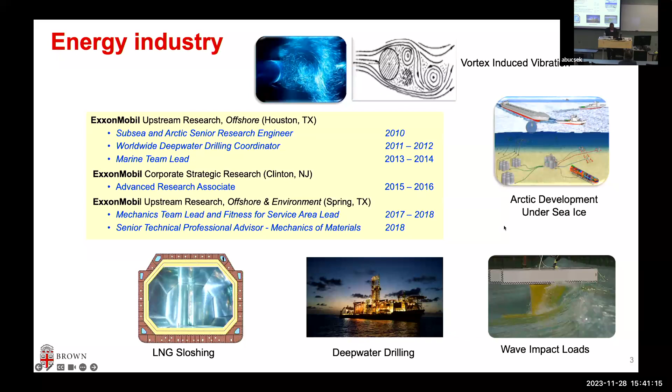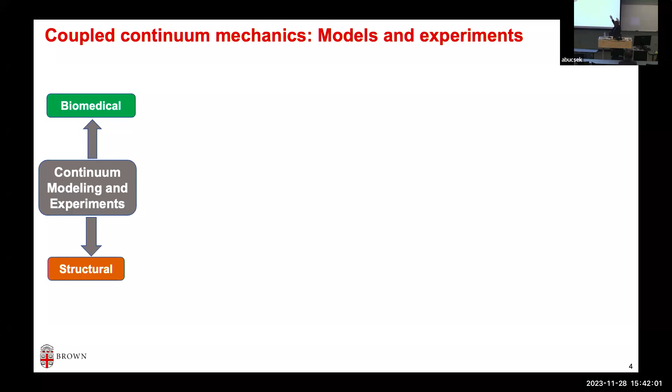What have I been doing at Brown for the last 5 years? Basically, my research group is in the development of theoretical frameworks or constitutive models for different kinds of materials. What are the pending problems? Typically very nonlinear materials, multi-physics problems, coupled mechanics. If I break down this continuum scale modeling, we divide it into two groups: structural mechanics, which I'm familiar with as a mechanical engineer, and a long-term vision of expanding mechanics into new and emerging areas. To me, biological materials where mechanics couples with biology is a frontier for me to go. So that's also a stream I'm working towards. These are the two groups defined.

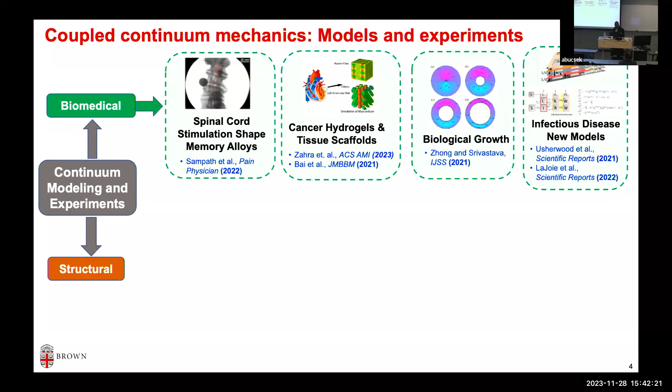So a bunch of different problems we have worked on, all the way from modeling particles to biological growth. I'm not going to talk about this work in detail, but if you're interested in any of the topics, this work has been published in the last 4 or 5 years, and you can find it. On the structure side...

You have all the various exotic materials like metastable steels that have phase transformation coupled with plasticity, which is deformation and temperature.

We're also looking at machine learning, which as students you're all definitely interested in - data science, machine learning, AI, all the words you hear. As a mechanics person I don't have that background, but as a constitutive model developer, when I talk to people in machine learning, they say their first job is to find a neural network that means you don't need to develop material models - give it experimental data and machine learning can figure out the material model. So they're kind of planning to make me unemployed, I guess. So my job is to develop the model. It's basically a joke, but I'm interested in keeping my eyes on developments in the neural network area. I'm not a computer scientist, I'm not interested in that, but where's the interface of applying machine learning concepts to structural mechanics problems? That was my goal.

So we had some funding from the Department of Transportation. We wrote the proposal, got funded, and worked on that area. I'll briefly talk about that. I talked about these two projects, I'll briefly mention them.

I'm going to leave the rest of the topics, but they're basically on the idea of developing deformation, fracture, or damage models at the continuum scale. What is continuum scale? It's the macroscopic scale where we interact with objects. But the interesting thing is all the physics happens at very, very small scales, normally 6 to 7 orders of magnitude below - at the atomistic scale for metals, the molecular polymer chain length for polymers. I'm trying to take that physics to develop models that can predict things at the macroscopic scale, and that's your continuum scale.

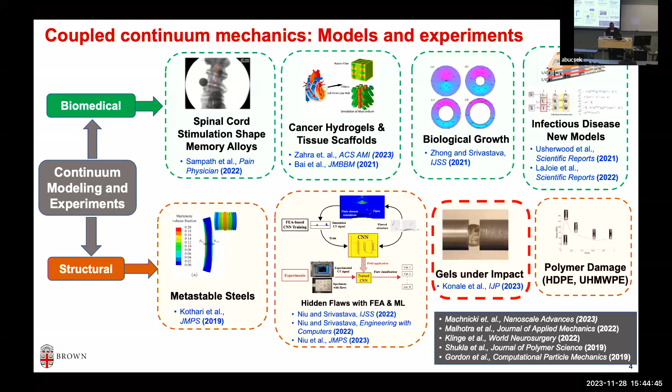So all these, you can find if you're interested in any topics - we have some papers out there on each of these topics that you can look up.

Oh my gosh, the control of the mouse here. Absolutely. It's unbelievable how protected this stuff is.

So what you saw is basically this very, very soft gel-like polymer, and this guy was hitting his hand with that layer - there's no injury. And I can give many, many examples. So what are these very soft, lightweight materials that can absorb all this impact energy? This is a case where experimental or commercial applications are ahead of the fundamental mechanics side - people know these materials can do this kind of behavior. Me, as a mechanics person, I want to understand and develop a mathematical model to model the behavior so we can design these structures.

And you'll find there's a broad set of applications, for sports injury - you can think about making helmets out of it - for the Navy, where we also got funding, putting a thin layer of structure that is lightweight to take shock energy. So all the way from impact, falling down, your knee pad, your shoes, to helmets, to shock absorbing for the Navy - this material. So we wanted to understand the physics and develop a physics-based model for this material.

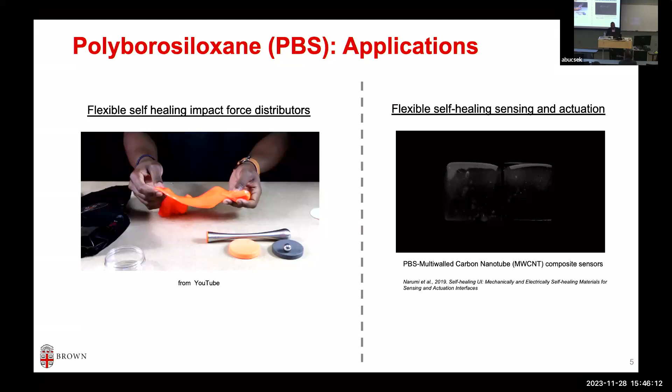These materials also have another interesting feature - self-healing. I'll tell you why: because they have these dynamic crosslinks.

This is an example of a material you can put conductive particles in, and from the stretching or deformation, you can actually get a resistivity change. You can make a sensor out of it.

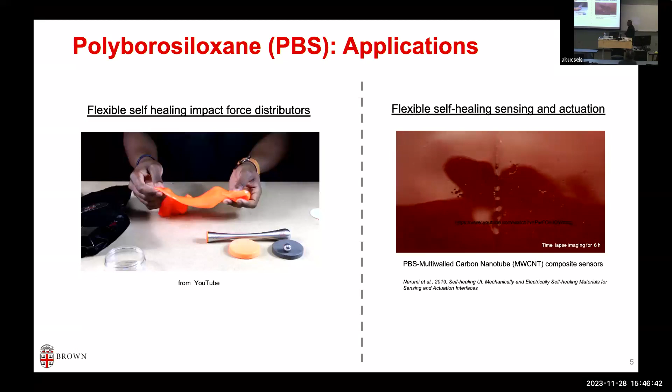You have a lot of applications, from protection to sensors to tissues, but these are self-healing. If you fracture these materials, put them together, and come back after 6 hours, you'll not know there was any failure there. So the self-healing properties are very important, and that gives it a lot of really important applications. Our interest is in modeling the behavior all the way from fracture, damage, and self-healing.

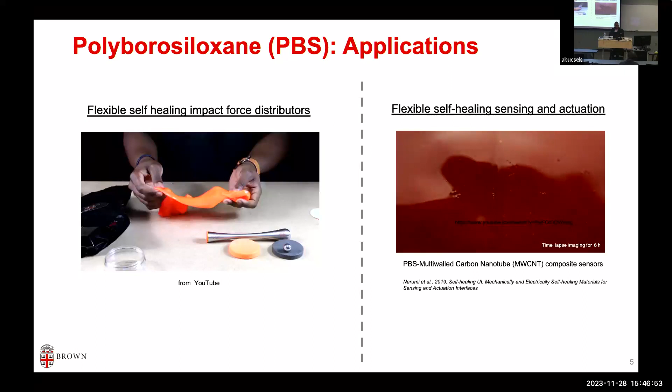That's really where we are heading. I'll talk briefly about this work and walk you through the mathematical modeling needed to model this kind of behavior. So what I showed you is one class of polymer: polyborosiloxane. It has dynamic reversible crosslinks, which gives it this rate-dependent behavior, with impact absorbing energy and self-healing properties.

These dynamic crosslinks - if you look at rubber, it's long chain molecules that look like a spaghetti ball. At the junction points, they're basically crosslinked. So when you apply load, you're stretching the network, and that's why it snaps back when you let go of the load. These junction points, in this case, are not permanent crosslinks like rubber - they're dynamic. They're forming and breaking, forming and breaking, and that's why you get very interesting properties, which I'll show you in the next slide.

So a lot of applications have already been mentioned to you, all the way from tissue engineering to impact absorption to self-healing sensors, and there's a whole plethora of literature out there in the last 4 or 5 years on a lot of applications. But we come at it from the side of understanding the behavior and modeling it.

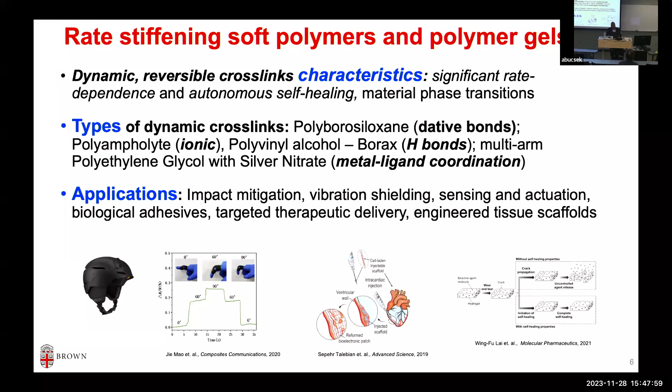So, like I said, my goal is to develop physics-based mathematical models, but we need good control to understand the behavior. First, we are interested in, for Navy applications, a very wide range of strain rates - how these materials behave. The literature data is either not there, or some of the data is questionable, so we have to do our own experiments.

So we actually spent some time trying to figure out how to make this material. These are two of my PhD students, very bright guys, and I have to give them credit for being able to do all the things I'm going to present on their behalf.

I'll skip the synthesis process, but if you look at this - polyborosiloxane is PDMS chains crosslinked by boric acid, and boric acid we used to play with like a powder for carom, I guess, when we were in India. That chemistry allows these crosslinks to form between boron and oxygen. One electron pair is basically shared between boron and oxygen, and that gives us this crosslink that is time dependent - it's breaking and forming, breaking and forming. These crosslinks give it the dynamic nature.

This is known - people who have done experiments already know this phenomenon. We took that and, of course, found it to be true. The question is, we don't know - that's only the crosslinking, dynamic crosslinking phenomenon that is known. We don't know if there's anything else going on, but we left that as a question mark.

So what does this PBS - short for polyborosiloxane - what does this dynamic crosslink do? When we make it, this is our own experiment now: if you make a sphere and put it on a table, it flows like a fluid. Just look at it on a 1-hour time scale, it will flow like a fluid. If you put it in your pocket for a few hours, it will go through the threads of your clothing. So it's fluid-like, except that instead of milliseconds, the time scale is basically hours. It flows like a fluid.

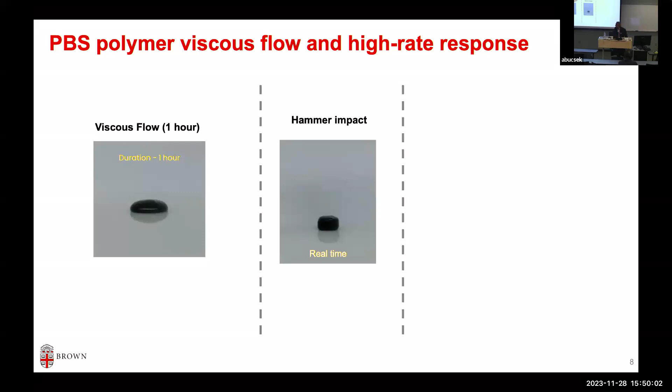So this is the real-time scale. If you look at the same material that flows like a fluid at the real-time scale, the hammer, it's basically showing very elastic material.

So yeah, some window has shown up on my laptop for some reason. That's not letting me actually move my mouse to where I want it to be.

The Kolsky bar is a very high rate experiment in the laboratory. You have two bars, you squish the sandwich, and hit it with a very fast projectile on one end that causes a stress wave to propagate.

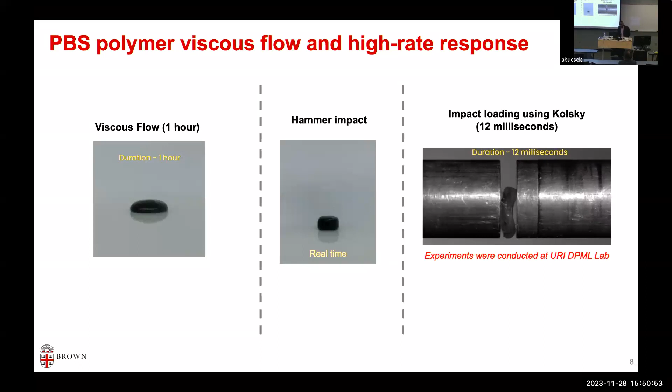So what this video shows is hours to seconds to milliseconds, about 12 milliseconds. You can see the material behaves very differently—it squishes completely and comes back. Very different behavior depending on the strain rate you're applying. All that is going on. This is a very qualitative experiment just to give you an appreciation for what's happening.

But technically, if you do scientific experiments to calibrate, this is the stress-strain behavior. As a mechanics person, we define material properties through one-dimensional stress-strain behavior. You can see very nonlinear behavior in the loading and unloading curves. Some of it is rubber-elastic-like recovery, but a lot of it is viscous dissipation, more fluid-like. It's a combination of fluid and solid-like behavior.

Very rate dependent. Moving from very small strain rate, 10 to the power minus 3, all the way to 10 to the power 4, it's highly rate dependent behavior. If I zoom into that small area, the quasi-static region, you can see very drastically rate dependent behavior with very interesting loading and unloading curves, and so on. I can take any strain value.

Looking at strain rate versus stress, you can see highly strain rate dependent behavior, which you already saw in the qualitative experiment. This is the quantitative version. A model should be based on these technical data and should be able to represent that, in one dimension.

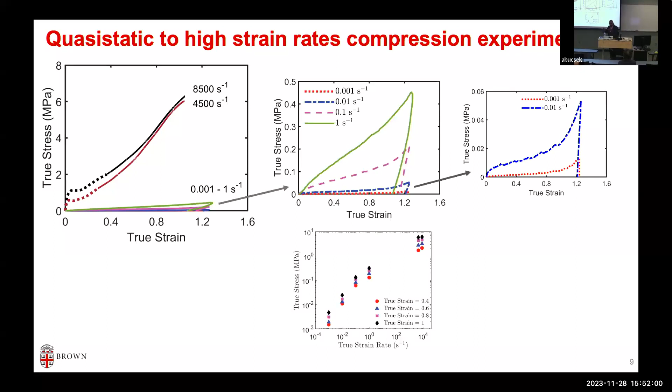Having seen those experiments, even the one-dimensional experiments on the physical behavior, now we want to develop a model. We know that the polymer's macroscopic behavior comes from the cross-linking, the network-level small scale behavior, which is cross-link dominated. So we said, let's take the first order approximation.

The kinetics of these crosslinks being formed and broken is first order. N is basically the subchain—between crosslinks you have a subchain that is elastically active from the network point of view. If you count those, the number of elastically active subchains is a function of some forward reaction rate: how many are being formed, how many are being broken. So you have a plus and minus sign, first order kinetics.

So we assume that, and we make some other simple assumptions. One is that when you deform a polymer or rubber as it's stretching, some stresses are being generated. When these subchains break and reform, they're going to form always at zero stress. That's a very physically intuitive thing to imagine—they're not forming at that high stress, they're forming at zero stress. So these are basic assumptions which make sense.

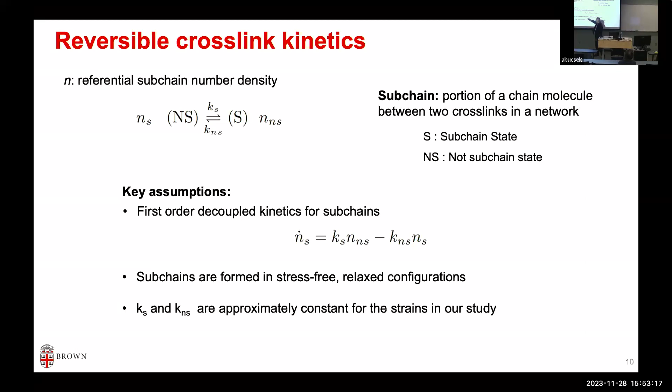So what we have done is use first order kinetics as the basic assumption to define the dynamic crosslink—the boron-oxygen bond that is being formed and broken. Then we did the stress relaxation experiment, in oscillatory rheology, like in a rheometer. All you do is apply a constant strain and watch the stress evolve. That's very viscoelastic behavior.

If you look at the first order kinetics, the shear modulus comes out like this with one parameter, and we can fit this rate parameter using experimental data. So there's the fit. But interestingly, if you take that simple assumption of first order kinetics, it gives a behavior similar to a linear viscoelastic Maxwell-like model with one spring and one dashpot.

For that model, we can write quantitative equations for the oscillatory rheology, where you subject the viscoelastic material to different strain rates. You get the G prime and G double prime, storage modulus and loss modulus functions. We can have expressions for these based on that assumption.

Now, from that one fit, we can predict—we found this very interesting—we're able to predict the G prime and G double prime quite well with that assumption. This tells us that for this strain rate range, from very slow quasi-static to moderate rate in the oscillatory rheology, the boron-oxygen dynamic crosslink is the dominant mechanism, and first order kinetics does a very good job. So this assumption works quite well in that range, and from this one fit we can predict this.

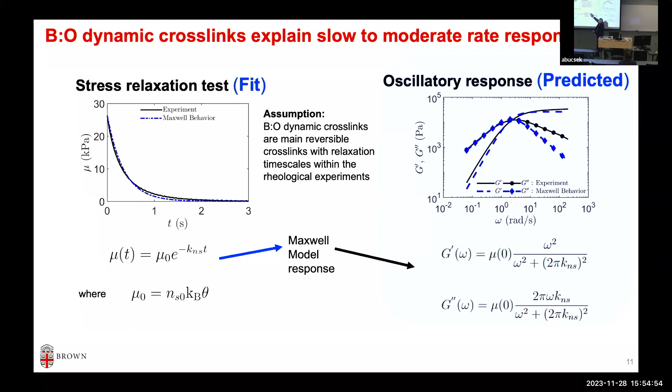So we found the time scale to be around 3 seconds, where you're looking at the fluid flow in that range. Now the question is: is there any other cross-linking mechanism, some other physics going on that other people don't know about?

So what we found in our own experiment at the very high rate—by the way, I skipped over doing the high rate experiment. Getting a good stress-strain curve for the soft material by itself is very challenging. Our collaborators spent 4 or 5 months to get this data. That mechanism cannot explain this large jump at high rate.

So there has to be another dynamic reversible crosslink mechanism. We propose that, and this is in our paper that we recently published. The second mechanism is this temporary entanglement.

Imagine these chains that also have a physical entanglement. If you're looking at larger time scale, they are sliding past each other. But at very short time scale, millisecond time scale, they actually act as junction points, as cross-linking. So intuitively, at slow strain rates you have this disentanglement, a fluid-like flow, driven by the interaction between the polymer chains, more like friction. But at very high rate, there's a lockup, and that lockup leads to this behavior.

That's our assumption. We have proposed basically 2 mechanisms from the experiment, all based on first order kinetics from the experiments. We have 2 mechanisms—one has a time scale of milliseconds that we found later.

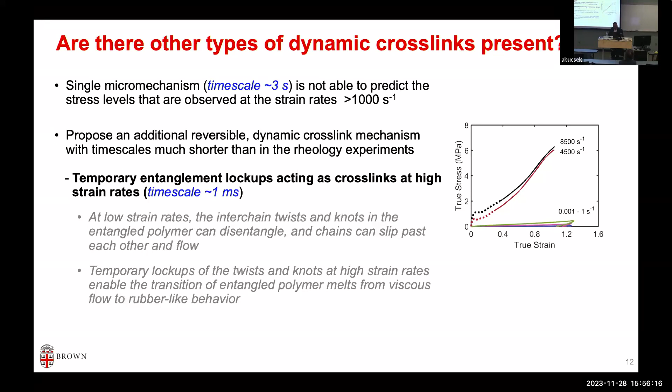So what are the key contributions? We have done characterization over a wide range, 10 to the power minus 3 to 10 to the power 4 per second, for these materials of interest at large strain. We have developed a microstructure motivated model.

I'll describe the model in a bit, but we found that in addition to boron-oxygen coordinate bond dynamics, there's also additional entanglement dynamic cross-linking, on the order of milliseconds, that is needed.

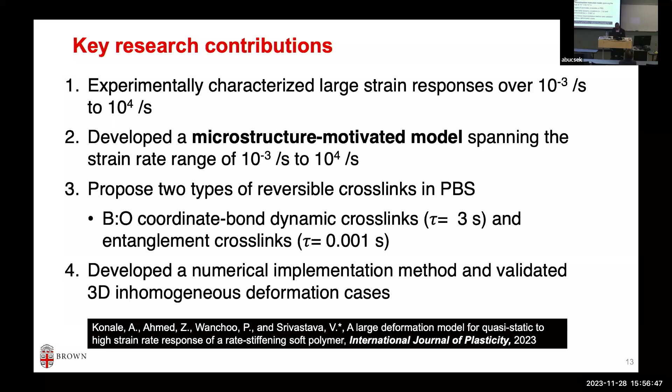We also developed the numerical implementation, which I'm not going to talk about, but you can find that information in the paper. So given this information, we found these 2 mechanisms.

For polymers, if you look at any formula, typically viscoelastic materials have 2 different mechanisms going on. One is intermolecular resistance—what happens in the nearby molecules. They may have some elastic behavior, and as your sliding chains pass each other, you also have some kind of dissipative or friction-like mechanism.

That is captured in our model as mechanism A. Then, same thing as a fishnet—you're stretching the whole fishnet, that's network stretching, known as the rubber mechanism. That is modeled as network B, the second network.

The second network has two components, B1 and B2, because you have two different dynamic reversible crosslinks: the boron-oxygen coordinate bond, and the entanglement based mechanism. That's the framework of our model.

The idea is that at very slow rate, these dynamic crosslinks are ineffective—the chains are sliding past each other, so you get a very viscous, fluid-like response. At high rates, these entanglements and different mechanisms play a role, so you have more of a network stretching behavior.

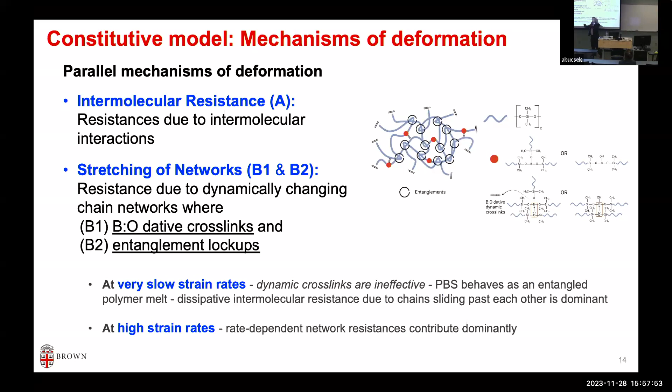That's the physical insight, now converted into some kind of schematic. If you want to picture the two mechanisms, A and B—again, the material isn't literally like this, but as a hypothetical image, think of a spring and dashpot from viscoelasticity, just imagine it in 3D and large deformation.

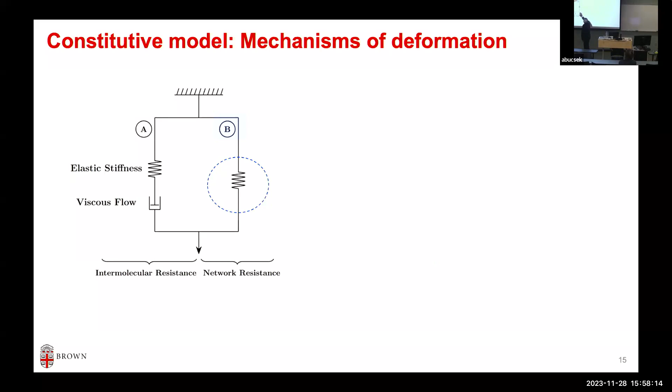Mechanism B has two mechanisms. The physical picture is each mechanism has a series of springs together, because as chains are breaking and forming over time from 0 to t, sub chains are formed at some prime time t'. So we only have to worry about the stress from t' to t.

A chain that started at 0 and deformed at time t has a different behavior than a chain formed at a much later time scale. So we have to account for all these things. The free energy, which is the mechanical response, will be a function of the summation of all these combined subchains for each of the mechanisms that we have to account for.

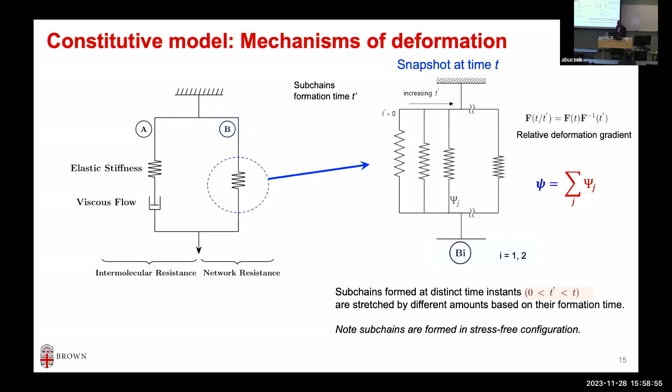So for mechanism A, again, we have done this in our standard viscoelasticity work when I was a PhD student. First mechanism: you can model elasticity using a three-dimensional linear elastic behavior. For the viscous part, we can use rate-dependent viscosity, strain rate, plastic strain rate as a function of stress, with or without temperature dependence.

This is a little bit more than what we've done in the past, we've taken that first mechanism. The only difference I want to highlight from what is conventional: a lot of times people see nonlinear behavior in soft materials and assume it's rubber elastic. Not all nonlinearity is elastic actually, a lot of it can be viscous. The difference is the physics is very different.

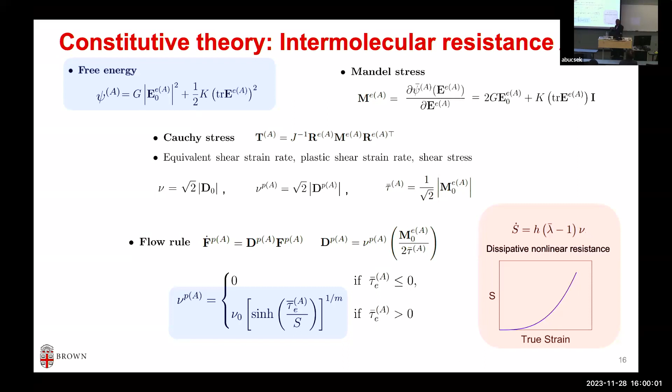Elastic will come back, viscous will not come back, right? So putting the wrong idea, just because we're used to using rubber models in the wrong place, can sometimes give trouble. So here, S is the viscous friction-like behavior. As the chains align more and get past each other, they get more and more friction, so you have a nonlinear dissipative term. That's your first mechanism.

Before I get to the second mechanism, it's all about network behavior, which comes from dynamic crosslinks that are forming and breaking. If I want to define the number of subchains that are actively forming crosslinks at any time, going from time 0 to delta t, this is basically whatever linear first kinetic equation I showed you, the same equation: forward reaction, backward reaction. But if you take the time step to be very small, you can convert a linear relation into an exponential relation.

Exponential series expansion to the power x is 1 plus x, so you can reverse it. You can convert that into an exponential function, and you can go from time delta t to any time 0 to any time t. What the exponential allows us to do is convert this kind of idea into a nice integral. So this is just background that will be needed later, because you have to keep track.

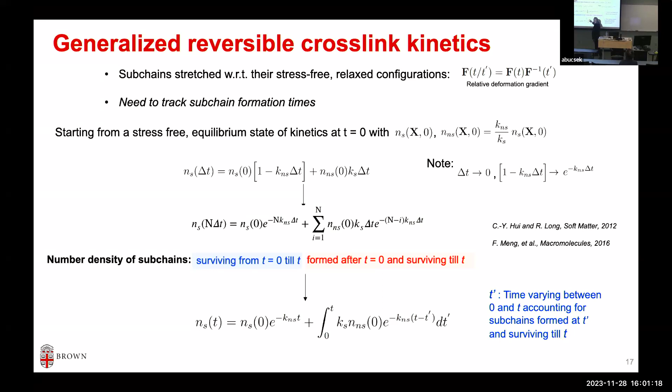The free energy is the summation of free energy at any given time of all the subchains that are active at that time, but they're formed at different times. So you have to really account for when they formed and how much they got stretched. That's why you need this summation kind of approach, and in continuum, you need to convert that into an integral. So at a very high level, that's the mathematics going on in the background.

So every time, if you take the idea of the number of crosslinks, or the number of subchains, and break it down into subchains that were started at time t equals 0, that's given by this, and subchains formed at different times are accounted for by this. We can bring that idea inside the free energy summation, which goes into an integral.

Now, this is standard continuum mechanics. If you've taken continuum mechanics, you know all this terminology: finite deformation, and so on. If you haven't, the simple definition for small deformation versus large deformation is that small deformation means we can neglect the geometry change, the current configuration and old configuration can be considered the same because the shape change is very, very small. In large deformation, the deformation is large enough that the geometry has changed.

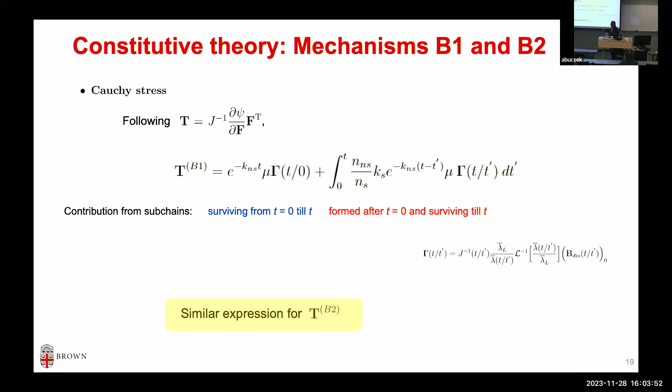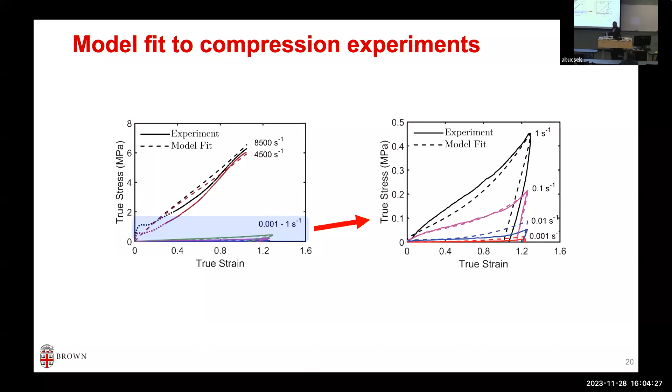The model is 3D, right? So we are pretty happy here. We calibrated it. The question is, since we used the data to calibrate it, that matching is by design, not by nature. So how do we really know the model has the predictive capability we can trust, especially for complex geometry when we are designing these sensors, tissues, or energy absorbing devices?

So what we did was an independent experiment. That's one of the reasons we do a lot of experimental work. We tested the model's 3D capabilities, even though the model was calibrated only on 1D data. We didn't touch the calibration, and we did independent experiments.

We took a 3D block and crushed it with a prismatic cylinder, like a punch, at different velocities and different rates. That causes a three-dimensional, inhomogeneous deformation, not uniform like a simple compression experiment. So we took the model and implemented it in Abaqus by writing a user material subroutine.

There's enough meat in the computational implementation too, because the model is time dependent. You have to keep track of when the chains were formed throughout the whole deformation. The deformation gradient has 9 terms, it's a second order matrix, and you have so many elements. For each element, for each time point, you have to keep track of the whole deformation gradient to predict things at the current point, which is very memory intensive and demanding.

So we came up with an approximate implementation where you don't have to keep track of all the history. Knowing only the last deformation gradient, you can predict that. That's all in the paper, so I'm skipping it. But nonetheless, we implemented the model and we can simulate it in Abaqus. If I can find my mouse somewhere.

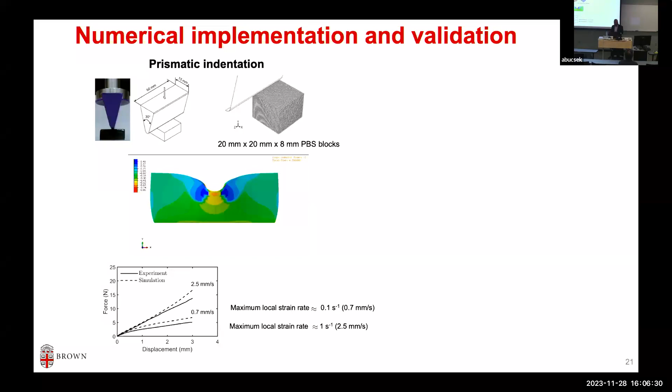A very quick summary of what we did: we published this work, the paper came out a few months ago, so if you're interested, you can read it.

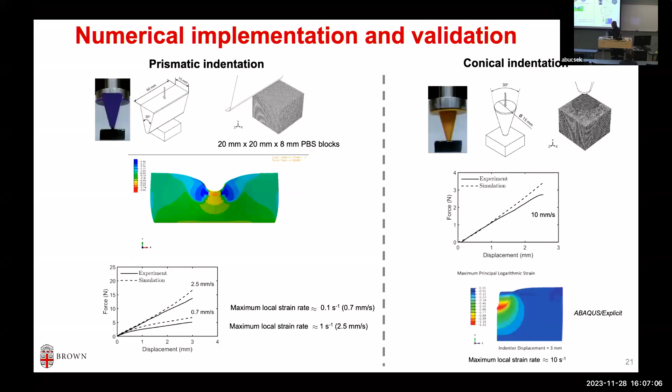You can imagine this being applied. So these dynamic reversible crosslinks are formed - what we show here is the coordinate bond, but there are many different polymers. You have ionic bonds, H-bonds, different mechanisms for dynamic reversible crosslinks. The whole array applies, but the same fundamentals hold. The physical mechanism of dynamic reversible crosslinks might differ. It's a pretty open field with a lot of application opportunities.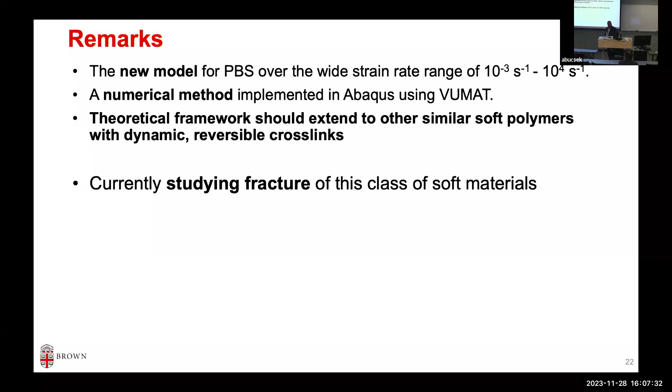What we're doing right now is studying the fracture and healing of this material. This is pretty fresh work from my student. If you make a hole in this material and let it go, it's going to flow like a fluid. But at time scales of 6 millimeters per second or 60 millimeters per second, there's a relaxation time scale. If you stretch it, it acts very brittle and fractures at high rate, but is much more stretchable at low rate.

So the fracture property is much more rate dependent. We are in the process of modeling this fracture, doing experiments and also modeling the self-healing that follows. If you look at the force deflection curve, at low rate it can stretch a lot more but takes only a smaller load. At high rate, it takes a larger load but fails earlier. The area under the curve might still be the same, but more work still has to be done. A lot of interesting things happen in this material as a function of rate dependent fracture, which I think is the next step for us to model.

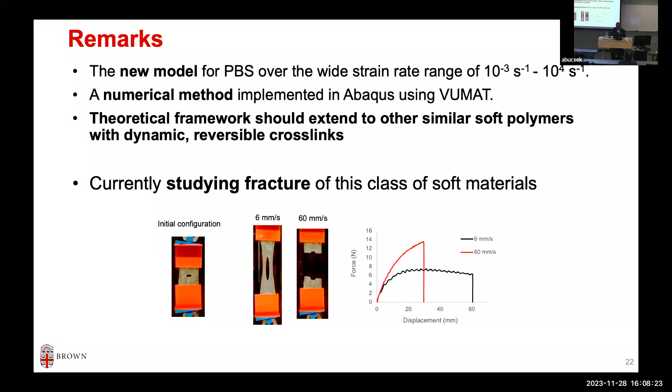So more work needs to be done. I'll switch over depending on time. I gave you some idea - I'll talk about two topics. That was one topic. The other was, as a mechanics person, the integration of neural networks with structural mechanics or solid mechanics modeling. So I said, let me pick two problems to solve, to teach myself - and of course that means my students have to learn, and I learn from them too.

So I'm interested in failure. Having worked at ExxonMobil, it's all about worrying about things failing, right? You don't want them to fail. There are two ways things can fail: one is fracture, catastrophic failure; the other is plasticity based, where you lose stiffness. Imagine a scale where you keep bending elastically and it comes back - but if you make a hinge and it plastically deforms, it will not come back. You lose that capacity. So plastic loss or fracture are the two key failure mechanisms. I wanted to test both.

And basically bring neural networks to solve the problem. Another thing I wanted to look at - if you view neural networks broadly, I classify them, at least in my understanding, as data driven. If you train a neural network with data, it's going to predict the future, right? That's the data driven approach, and we need a lot of data for that. I wanted to apply that one. The other is a very newly emerging field: physics informed neural networks. The idea is that you give the physics of the problem, but no data, and the neural network should still be able to predict.

I don't want to say who, but Michael Ortiz had actually originally done this work too - he just didn't coin the term PINN. George Karniadakis at Brown coined that word. That term came out around 2019, and the paper has gotten about 8,000 citations in 4 years. That terminology stuck. So that's the pitch, but the idea is basically the same. Even your advisor, Michael Ortiz, had done it under a different name - instead of data, you give the physics of the problem and you should be able to predict the outcome. So we wanted to try those two classes of problems.

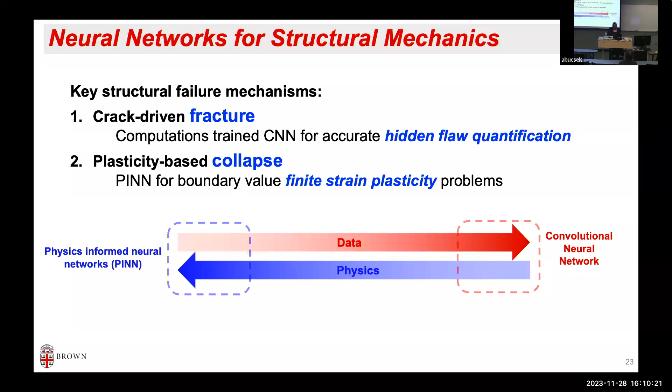The first problem I picked was a very well established, known problem in industry - still a tough one. If you have an embedded crack anywhere, things fail because there's a crack you cannot detect. Once the crack size becomes critical, the load will cause fast fracture and catastrophic failure. Detecting it beforehand was part of the goal - to develop a better fracture model. But the input to a fracture model is the crack length and the load. You know the load better, but if you can't see inside the structure, you don't know the crack size - so how do you know you're predicting the right life? Industry has these non-destructive evaluation techniques - under ultrasound, the signal gets perturbed by the crack - and I was in the midst of all this with a lot of infrastructure. What we found - this can become a long story - but we picked the 5 best companies, gave them samples that nobody knew the contents of, though we knew there were flaws inside, and asked them to predict what was inside.

It took us 1.5 years to go one by one through the same samples. We got the data, cut open these pieces, and found that they missed 33% of the flaws. Not to mention characterizing the length and stuff - they would say small, big, large, some rough estimation, but they didn't even detect it. So there's a big problem: how do you predict and quantify a crack that you cannot see, embedded inside the material?

So I picked that problem and wrote a proposal. At that point I thought it was an ambitious proposal, and the chances of not getting funded were pretty high. I proposed everything - neural networks, this and that - but it got funded. So we actually got to work on it, and my student got to work on it. We ended up learning a lot.

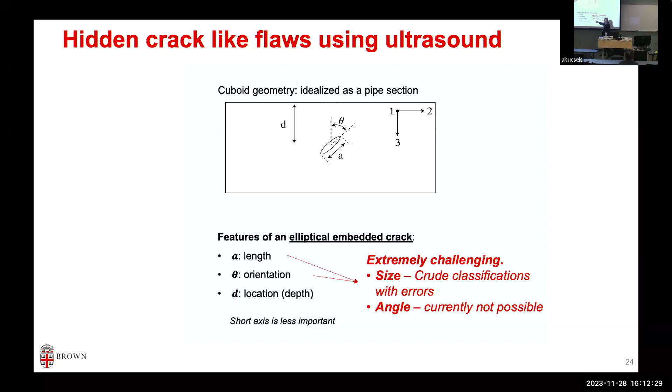But nonetheless, all three of these features from ultrasound - size, which they can do crudely and still miss something, quantification which isn't there, and angle, which nobody talks about - even now nobody assumes we can do that in large structures. So that was the goal.

The idea is, if you look at ultrasound now, you can actually create a 2D image. But in ultrasound physics, you send a wave, it gets perturbed by something, and comes back. When you get a 2D image, you have a bunch of sensors and an algorithm that takes that data, post-processes it, and comes up with an image. So the raw data has already been manipulated.

Our idea was, first of all, when you have large structures like hundreds of miles of pipes and large bridges, you don't have the luxury of using multiple sensors for half an hour or 20 minutes at one point. You have to move fast - you only have microseconds to measure the data. You cannot do a 2D image, so we didn't want to change the raw data.

Our hypothesis was that raw data has all the information to predict the angle and so on, but the perturbation is so subtle that our human brains cannot really understand it. That's the current method - highly paid experts look at the data and try to predict what's inside. We said, let's get rid of the human element. How? By bringing in machine learning. That was the proposal - take the human out, but the information is there in the ultrasound data.

The second problem is, for machine learning to predict anything, you need to train it, and to train it you need data. For this kind of problem, data doesn't exist because you cannot see what's inside, so we decided to create the data. Our second hypothesis was that if you get the physics right with a computational simulation that accurately predicts real life, I don't need experimental data - I can train my neural network purely on computation, and it should predict things in real life. That was the proposal.

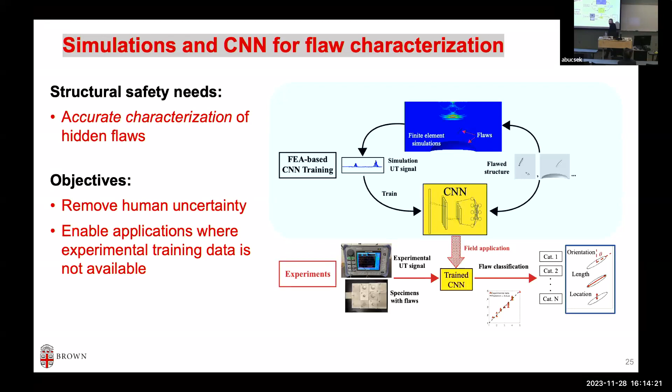We have a CNN trained by finite element simulation of ultrasound - trained computationally. If I go and do an experiment, it should be able to predict what's there. And that's what we ended up doing.

Here's an example. Imagine it's a 3D cube - you have a sensor at one place, you send the signal out, it goes in all three dimensions like a cone, and gets perturbed by any deformity. Some of it comes back, again going in all directions, with only a little bit returning to the sensor recording it. The hypothesis was that this contains enough information to tell us what's there. Again, like writing a proposal, you want to make it overreaching.

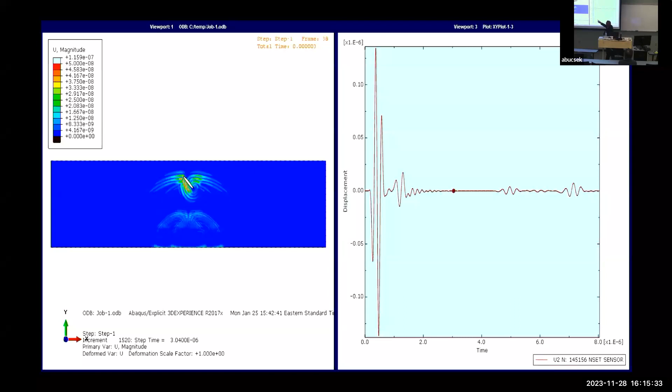I'll go through this one, I guess. So you can see the ultrasound goes back, some of it gets reflected back and comes back. And really that's what's happening in real life. This is the replication in computer.

So we replicated the experiment with the simulations completely. And what you get at the signal is you send some sine wave, and all you're getting is some reflection back, a very small signal. This perturbation in the signal is coming back because something is there, and the changes in it will tell the size, the location, and stuff like that.

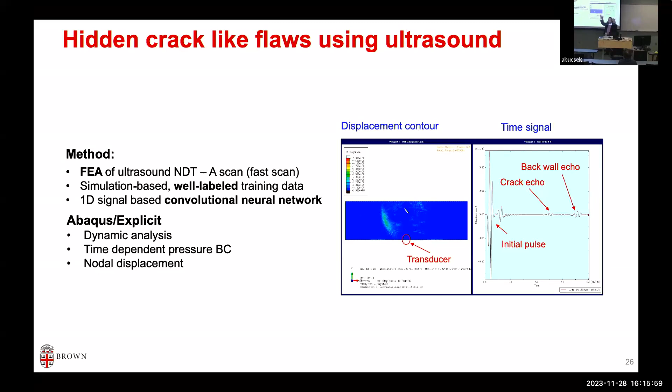And again, we had a neural network architecture. We did a bunch of computation, which is still non-trivial, but nonetheless is orders of magnitude better than doing the experiments, which are quite expensive and impossible to do.

But here's the finding. This was a study by government and industry, the latest state of the art in the lab, where you try to measure the length of a crack that you cannot see. This 45-degree line is actual versus measured. If you have 100% accurate measurement, the dots will lie on the 45-degree line. Anything away from it is the amount of error you see.

And this is our prediction. So the CNN was trained on computational finite element simulation, and we built an experimental setup, bought an ultrasound that's used, and made these samples with cracks inside that look like this, with embedded 3D cracks that you cannot see, at different locations, angles, and sizes.

And we took the ultrasound measurement, fed it to that CNN. This is the prediction for the actual experimental data, for a CNN that had never seen the experiment before. You see how accurate we are in predicting the length.

The location I always think is easier, but the orientation, I was really surprised. The small changes in tracking, it was able to predict. So I think it's very promising in certain classes of problems. It's an application of neural network, and this one worked out quite well. So we have a bunch of work on that, also published in the last few years.

How do you make the embedded cracks? Good question. So the problem is making embedded cracks here. Thank God, at that point the 3D printing of metal had established quite well. So these are 3D printed things, because there's no way to machine something inside, especially an elliptical 3D crack.

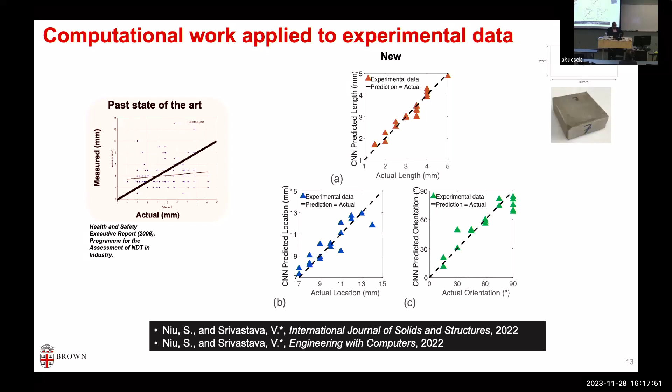The second thing to briefly say, so that was an example of fracture-driven failure motivation, but with the database that you understand, it's CNN, right? Train it and predict it. But if you train it well, it has promise in engineering applications. That's what I saw from the conclusion.

Otherwise, if you don't have any data, I wanted to go to the other extreme and pick the plasticity problem, because my research background is plasticity. I've done a lot of work in plasticity. So again, nobody has looked at the finite deformation, large deformation plasticity problem. In that loading, unloading, history-dependent problem, we wanted to see if we could predict large deformation, loading, unloading. And if we have to characterize the material, can we not give it a model, just give it experimental data, let it figure out the basic plasticity model by itself, and really study what PINN can do, as an emerging field, to understand if it has that capability.

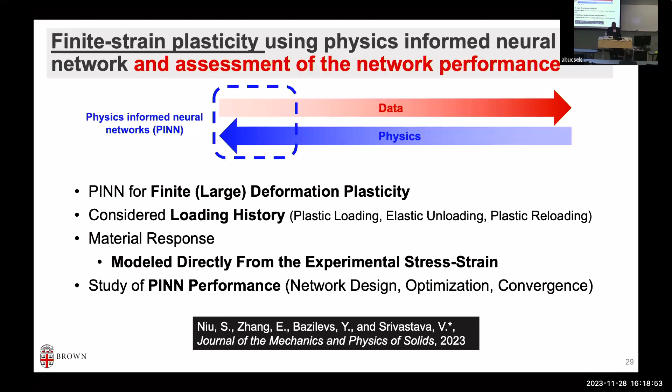Because I know finite element and mechanics quite well, this was all new to me. So in order to do the large deformation plasticity problem, the elastic-plastic material is isotropic, with rate-independent hardening. This is the conventional plasticity framework for that. Elasticity, again, is a three-dimensional tensor, and plasticity has this yield function. So it's rate-independent plasticity. I won't go into details, but it's basically a finite deformation plasticity framework.

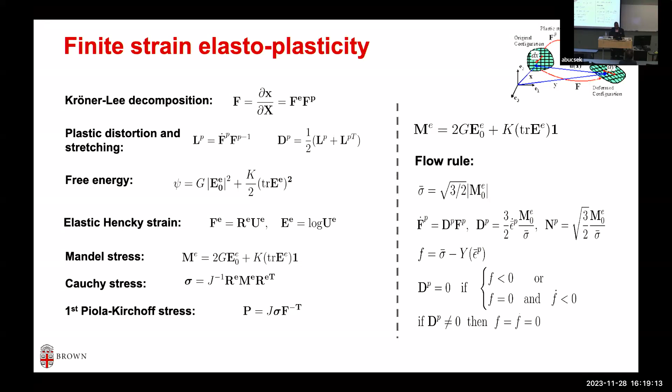Since we are going to need all this as part of the PINN, what we know, right? We need to know what physics we're going to input to the neural network. So also, if you want to solve the finite deformation plastic problem, the numerical procedure has to be established. Again, we have done this in the past, so we took that numerical procedure.

The idea here is when you're trying to solve an incremental plasticity problem, you always assume things to be elastic for the next step. Every step you have to calculate stress from deformation. If you're outside the yield surface, you correct it. If you're within the yield surface, the elastic assumption is correct. That elastic predictor, plastic corrector is the methodology. This is the framework, nothing special to talk about here, but we need that.

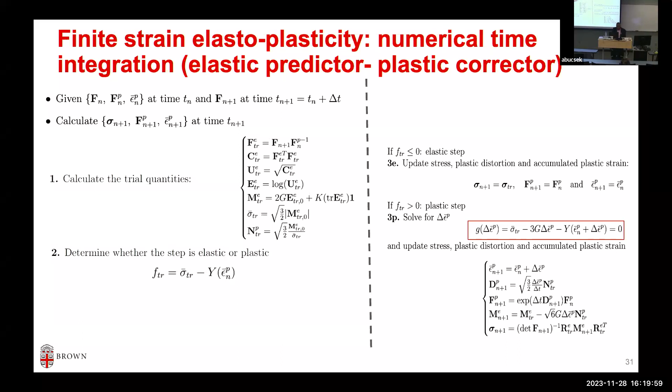So this is the PINN network. The idea here is we're not giving it any data, but we're asking it to solve a finite deformation plasticity boundary value problem, not any data. So we need to understand how does the neural network work?

You get some data, it has basically weight functions. It minimizes the loss and adjusts the weight functions. Once it's optimized to minimize the loss for the data, it's going to predict the next problem. That's the idea. Now, the structure is still a neural network that has weights. They need to be optimized to predict the problem, but you don't have data. Somehow the losses that you're getting from the data, the errors that you're minimizing, you have to do that.

So here I'm going to say, I'm going to give everything that I know about the physics of the problem, use that as a way to reduce the loss difference and train the data. That's really the idea of PINNs. In very simple terms, that's exactly what it is.

In our problem, finite deformation plasticity, not getting into detail, you can take a stress strain curve and just feed it directly instead of providing a model. There's an auxiliary neural network that can basically learn from it. So skip that, but there is a constitutive model that is not fed in, it's automatically learned - this is the PINN part.

What is important is displacement and stress. We want PINN to predict displacement and stress, because once you know the displacement and stress, you can calculate from the displacement, take the derivatives, calculate the strains and so on. So I only need to predict two, but we took this semi or mixed approach - we said PINN is going to predict the plastic deformation gradient and plastic strain increment as well instead of calculating it, because taking derivatives gives a lot of error.

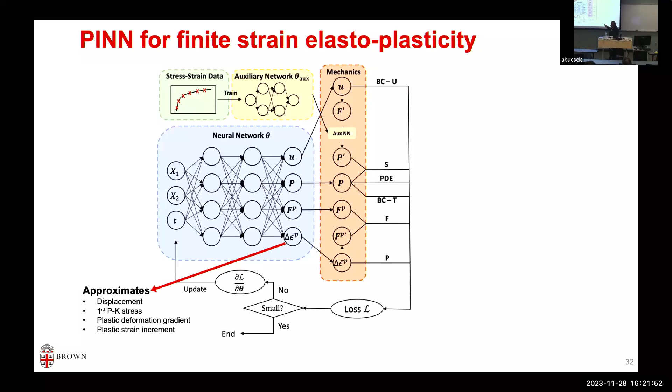If displacement has error, if PINN is going to make up stuff, let's make up stuff for all the things. Let's not calculate anything - it's going to predict all these things. Let me just briefly tell you what we really did.

So given the boundary value problem, this is your PDE, which is basically the momentum equation. You say every single point in your boundary value problem has to satisfy that, no matter what form you bring everything to on the reference side, the right hand side is 0. So every point you calculate the PDE value, the loss function, and you minimize that. No brainer, right? But again, it's an important thing - that's the physics of the problem.

So in any boundary value problem, you know the traction, and there's some kind of boundary conditions - either you're applying force in one direction, displacement, whatever you know about the problem, that thing is known. Whatever your PINN is calculating, you minimize the loss from that. That's another loss - the displacement and the traction boundary condition.

Another loss function is from the constitutive relation. This thing knows the constitutive relationship is finite deformation plasticity - it's got the stress strain curve. Using that, it's predicting these things. It's going to calculate these using the framework I showed you from displacement. It's going to calculate the plastic deformation gradient and the Piola-Kirchhoff stress, and compare it against the prediction from the PINN. Again, minimize the loss. So this becomes the loss function really - instead of data, the loss function is coming from physics.

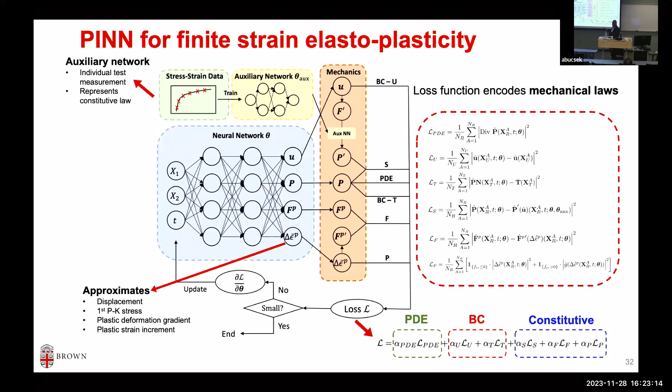We pick the problem - we take a plate, put a hole in it, and stretch it. I was hoping that the PINN doesn't do a good job - that was really my thing, do it and then we'll find some way to justify it. I know finite element, so we did the benchmark in finite element, we can refine the mesh, we can solve that problem much more easily.

So displacement, stress, and plastic strain, right? We did loading, unloading, reloading - loaded it beyond yield, unloaded, then reloaded to way further where we loaded. We compared the PINN prediction against Abaqus, and they were pretty similar. That was a pretty interesting finding.

I was trying to say that PINN, without any data, if I provide it all these things, the errors were so small. So that's what we did, and we applied it for the first time to the finite deformation problem without giving it a material model. That was pretty interesting - one of the things I see for this problem is a substitute computational method. I don't need a finite element software in this case.

But the problem is, there's a JMPS paper where we showed this methodology. We also wanted to understand - with finite element, you have mesh size, mesh type, element size, all these knobs that we understand quite well what to pick for a given problem. You can do mesh convergence where you don't know the answer, to know you've come close to the right answer. But with PINNs, there's a bunch of knobs - how many layers of network, how many neurons, how many activation functions - things you have to select.

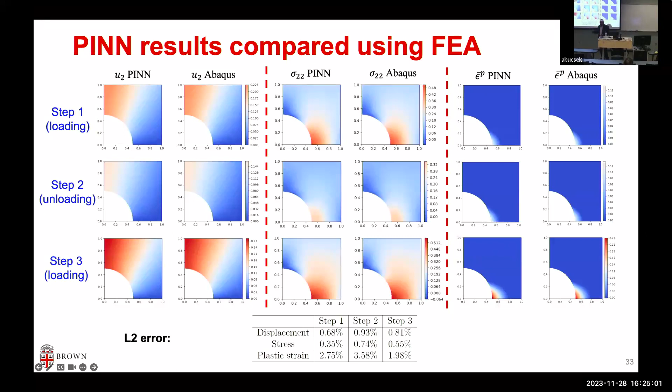So one part of this work was trying to understand, if I can solve the problem, what is the behavior of some of these things? I'm not going into detail, but I'll pick one example. You look at what are better activation functions for this problem - there are certain activation functions that work better.

But mesh convergence, right? In finite element, if you go from coarse mesh to fine mesh, what you're plotting here is the log error on the y-axis versus the mesh size. In finite element, that's the solid line, and PINN is the dotted line. You get what you get - as you refine the mesh, you get lower and lower error.

Guess what happens here? The PINN followed the same trend, but guess what - at some point, refining the mesh, or what we call the collocation point, same idea, you actually start to increase error. So there are some unknowns that are still not very clear - if you're given a new problem, how do you know when to stop, how to tweak it? Because if I know the answer, I can pick the right point, but if you don't know the answer, there are some open questions. We have some studies like that to inform the future generation of PINN users.

This is an example. On the other side, with finite element, if you go much more coarse, at this point, from here to here, you still get some solution, just with larger error. With PINN, at some point, you fall off the cliff - here, you didn't even get the correct answer. You get no plasticity here. So there are some nuances in PINN that we noticed and talked about.

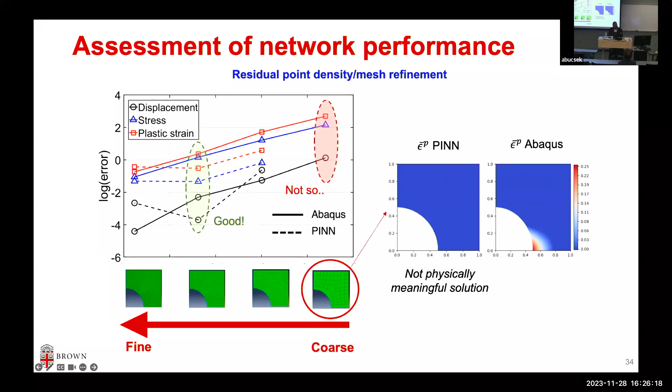So these are the two examples, really. I don't want to keep talking too much about it, and I'll stop with that. A bunch of really good students get things done, and I picked those two topics. But you can take the idea of material modeling and apply it to a bunch of biological or structural mechanics projects - that's what we do. Thank you for your time.

Questions or comments?

Can you customize the stress strain of PDMS through the synthesis process - like changing that and then getting a more customizable response?

Yes, so there is some customization. Time scales, for example - relaxation time scale - by selecting the molecular weight. So when you buy polymers to make these long chain molecules, the chemistry defines the polymer name, but the chain length you can repeat or change. So by molecular weight or chain length, and the amount you put in to make your solution, less versus more will change the number. So there's a bunch of ways you can customize - maybe not orders of magnitude, but within a finite range you have flexibility. Absolutely.